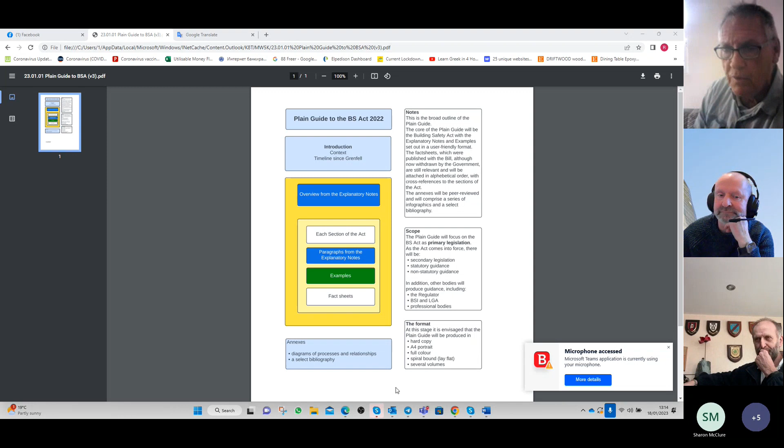Well, listen, as you know, we record these sessions and do transcripts and high point documents, so I will actually send him literally what you guys have said.

Just to jump on it, and I think, I'm going to do this in a bit of a self-centered way, really, is that if we all understand, maybe as we do in these forums, actually how you construct, how you do appropriate workmanship. I think the question really for me is that I'm really interested in the effect on what happens with Regulation 7. And the reason Regulation 7 is so powerful to me is because it doesn't tell you which way to meet the appropriateness of dealing with a hazard, there's many different ways of doing it.

So I'm quite interested in what they're going to do around CPR, because just because something's CE marked, it doesn't mean it's appropriate to put it in certain instances. It's a bit like just because you've got a damper, or I'll use your example, Chris, it's from Siderise, right? So if you've got a 476 cavity barrier, it's under a BS, and that's appropriate for certain circumstances. But if you've got a linear gap, then 476 isn't appropriate, it's an EN.

That's differentiating in Regulation 7, but you can't have something under 476 which is CPR because it's not European, and under the European system. That's the bit I'm really interested in, because what I've found is, in my experience, people don't know the difference between EN and BS.

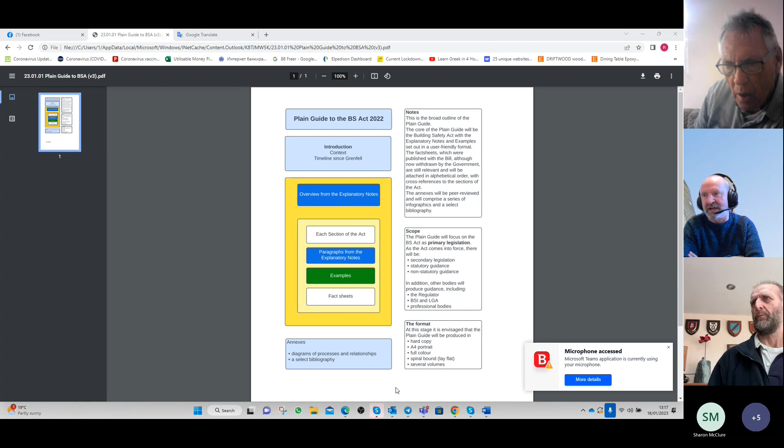So for us as manufacturers, we have to accept that we've almost become partially part of the educational process, because a lot of our end users, some of them are very knowledgeable, but some of them have not got a Scooby-Doo. We've ended up becoming de facto designers.

I'm just thinking of a good analogy here - it's like going to a grocer and asking for a tomato, then going back and complaining it doesn't go in your fruit salad, isn't it? It's the same thing. You know what I mean? It's that old chestnut.

Is there anything else? You sold it to me. No, that's it for me. Sorry, is there anything else? I'd like - I was just picking up on what Paul was saying there in terms of people understanding and appreciating the importance of this. I was just knocking something together, that's why I wasn't concentrating when you asked me the question.

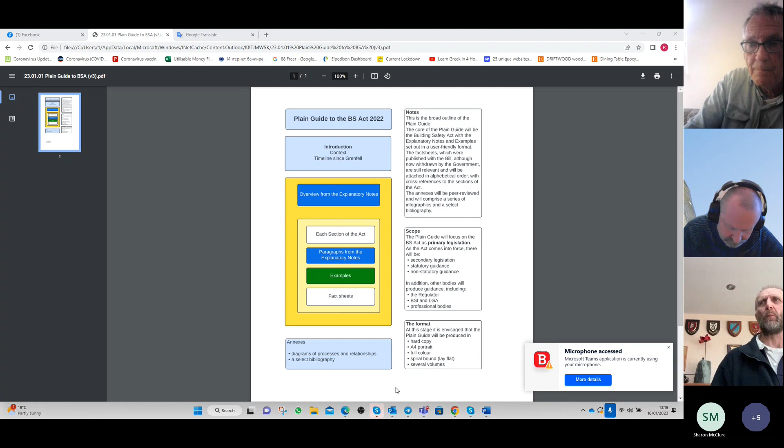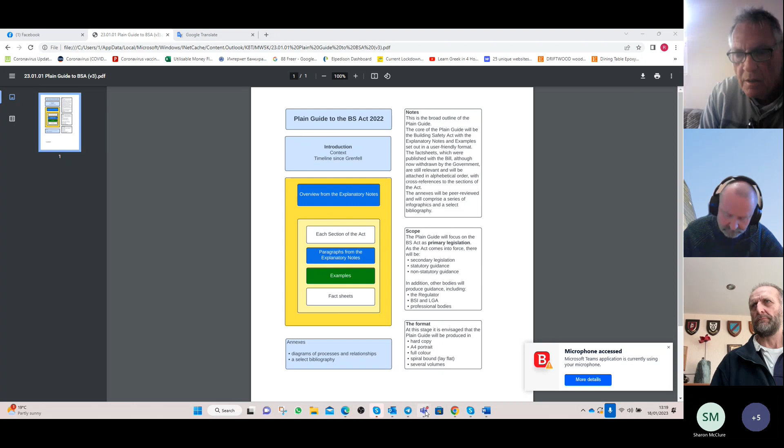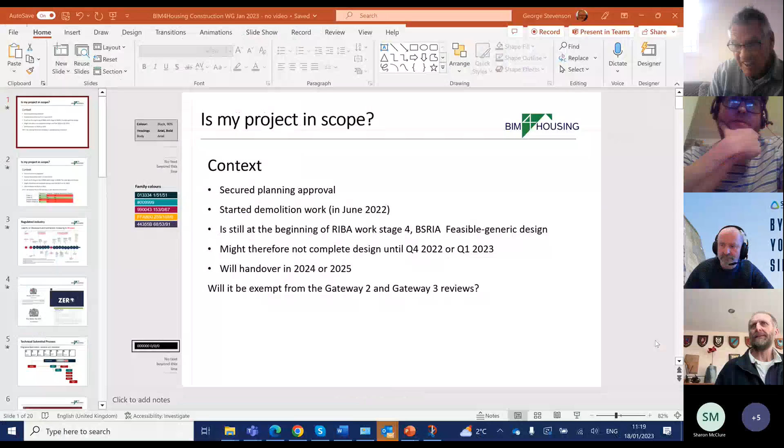So I was really picking up on what Paul was saying earlier. So if I look at - I've just realised I've not shared my screen yet. So one of the things that we were looking at before Christmas was really from a construction point of view - is my project in scope? Some of you might have seen this.

If you've got a project that has secured planning approval, demolition work has already started, it's still at the beginning of RIBA 4, and in this particular case, design is going to be completed this quarter, and then it will hand over in 2024. Is that in scope? And will it therefore be exempt from Gateway 2 and Gateway 3? Now those questions should be relatively clear, you'd have thought.

But when we actually asked specialists, we found there was absolutely no consistency among the people who are subject matter experts as to whether it was or wasn't. I thought that was really quite interesting and of concern. I don't know whether that sort of ambiguity - I know Jan's on the phone. What would you say on that, Jan?

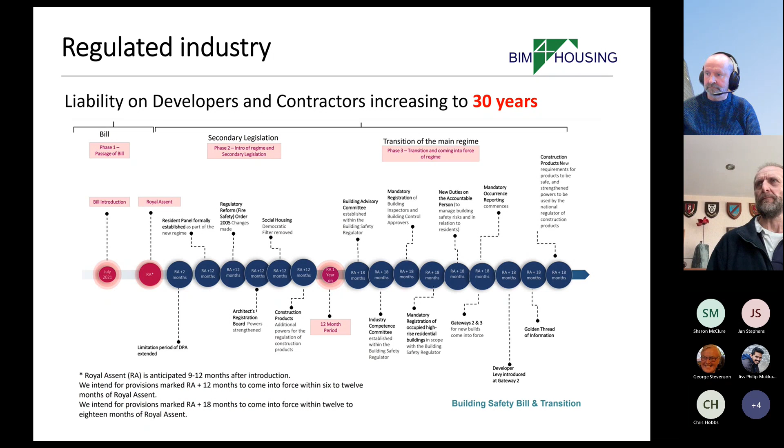So would you say that's one aspect? The other aspect we've got - sorry, this is coming - we've obviously got the Building Safety Act, we've got the Fire Safety Act, and what's become clear is that those are two different regulators who are looking at things from a different perspective.

The other aspect I think we're tracking at the moment is carbon. Most of you know we've got this partnership with Zero. When we started it two years ago, it had 20 members - we've now got over 800, and there's a lot of activity going on around that.

One of the things that's come out of that is we're collaborating with a company called 2050 Materials to get embodied carbon information using the templator, so that can then go into product libraries. The idea is we've got a mechanism whereby products can be tested for their information requirements, and if somebody then swaps something out, we've got a mechanism to track that those products have been swapped, and therefore we've got the means to engage with people like Travis Perkins.

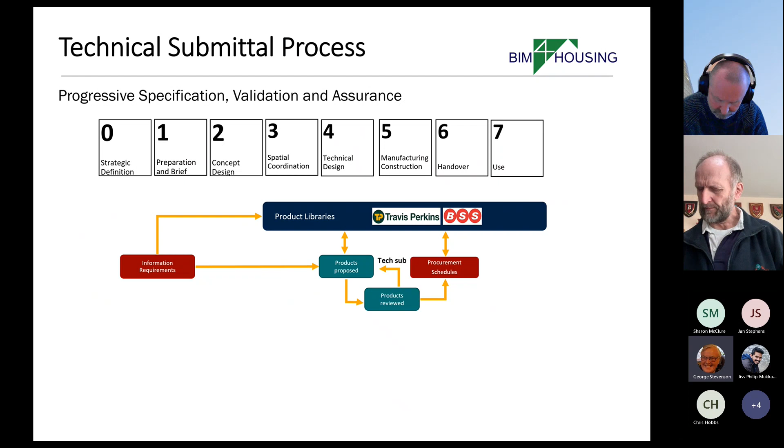One of the things Paul's going to come on to in a minute is the work he's been doing, or we've been doing together, to track through from specification to product selection. An aspect of that we've been working on - this is with Bouygues, Balfour Beatty, we've now got ISG agreed to collaborate with it, and Barclay Group - is having a standardized BIM4Housing library of data sheets.

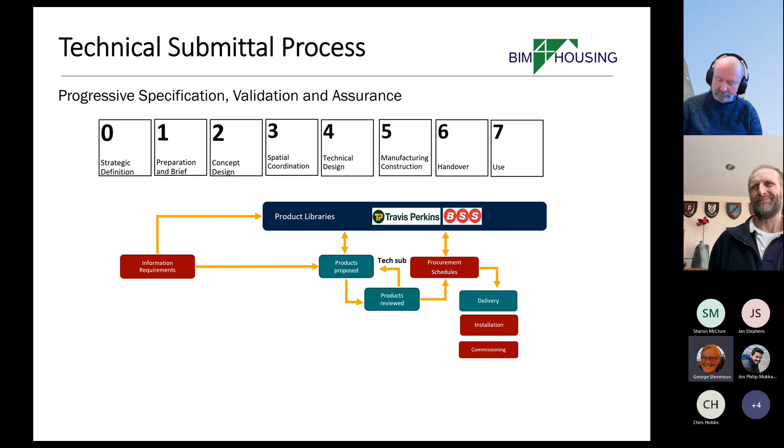So manufacturers' data sheets, so that we've got a mechanism, at least at a basic level, to be able to have a common library that anybody can access to put together information. That's something we're getting underway, and we've got Lloyd's Register engaged in that process, and I've got a conversation later this month with BSI. What we're trying to do is look at the collection of manufacturers' product data, but in a much simpler way than we've been trying to do with Lexicon.

Lexicon we're very supportive of, we want that to move forward. But in the interim, if we've just got data sheets from manufacturers as PDFs, if we can create a library of that, it's going to make it a lot easier for people to track things through. So this is the product library we've developed as ActivePlan, but it's free, and it enables manufacturers to provide their information either as a data sheet or as a document. And this is Materials 2050, these are the people that are going to put their information into the product library.

They've got carbon information on all of these product types, so it's just a different perspective, but the objective here is because I'm told that constructors are being asked extensively for carbon information. So we've got fire safety, we've got building safety as drivers, but now we've got carbon as well. I'll just stop for a minute. Does that make sense to people, that this is what we should be doing?

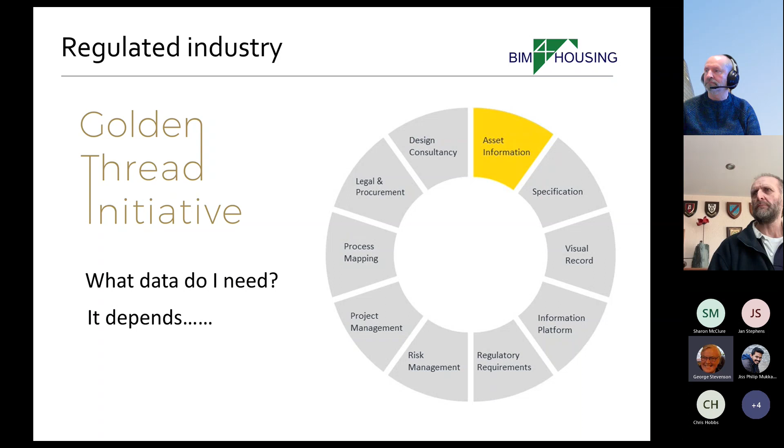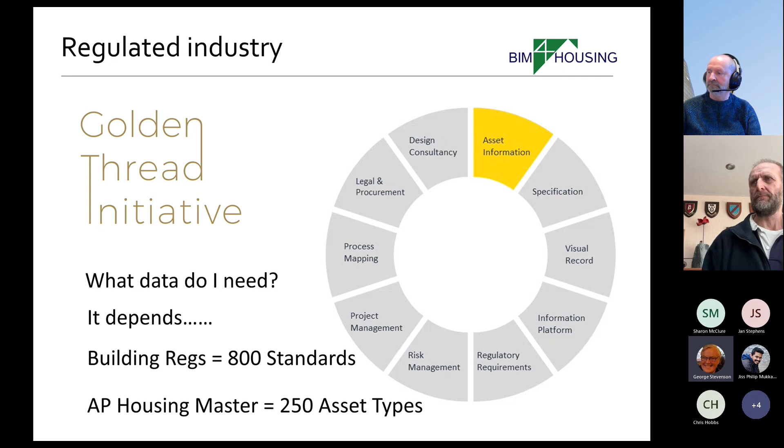You've seen this before, but the key thing is making sure that we're getting the right data for the right purpose. One of the main questions we've had is, for example, if we've got a cavity barrier, what information do we need to know about it? It always depends, and because we've got so many standards to refer to, we need to tie it back to some prescriptive situations, which Paul's going to go through.

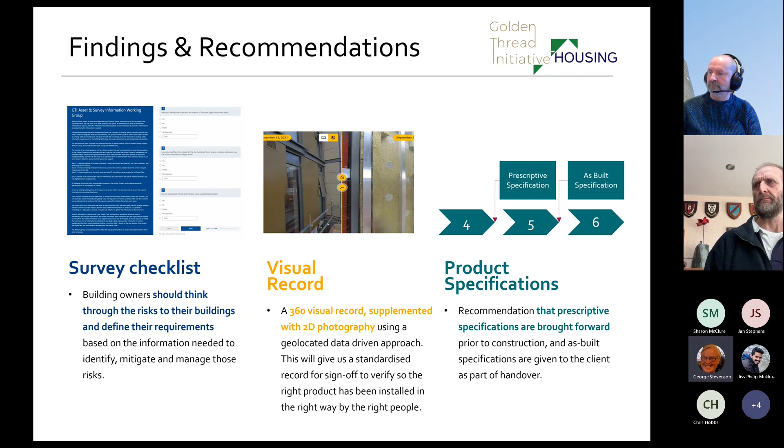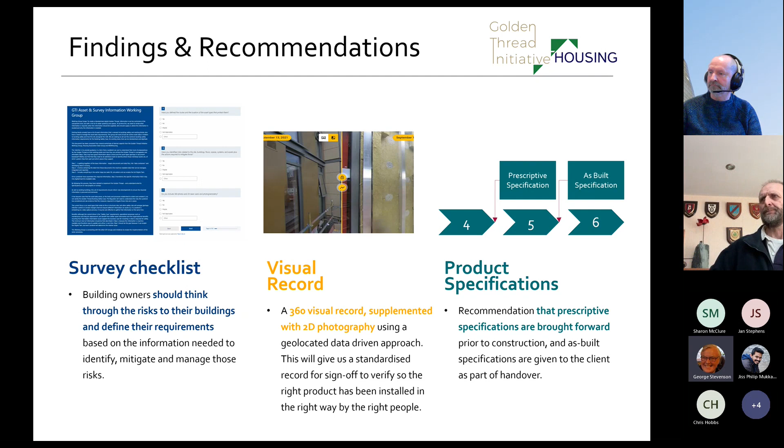The work we've been doing is to try and look at how we can capture the information that's needed as documents, then as visual records, but then this issue of how do we go from descriptive specifications to prescriptive, and bring the whole process forward so that work is done much earlier, so that we can address the gateways.

I think I'll stop there now and just ask Paul, would you explain what we've been trying to do in the tier 1 group? Yeah, I'll tell you what it is.

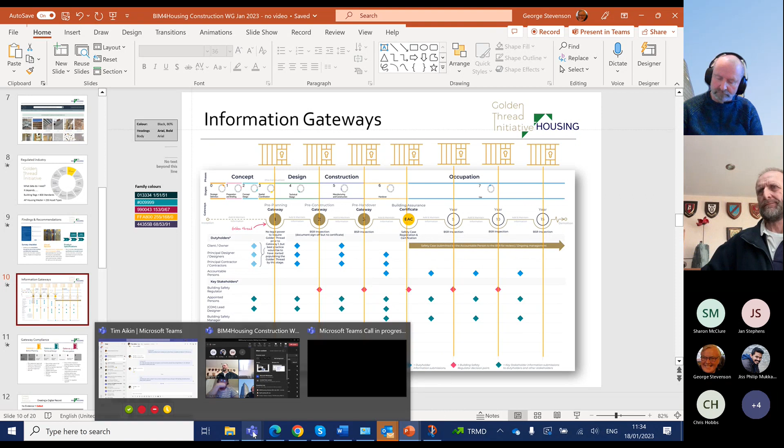Let me just bring my screen up as well. Hold on, I've lost you. Here we go, put my camera back on for a second. Hold on, is it going to work again? That's it, sorry, every time someone shares it goes a bit funny. You can't get people, they start freezing. That's why I've turned it off, so I do apologise.

So look, there's a couple of things that have been going on. Probably to explain, there's many different things happening in the industry. One of the big things for me, which I've been trying to get working with other people externally as well, is around things around—there's a thing that's been launched called the Passive Fire Knowledge Group, and I'll explain how this is all going to tie together.

That's the ASFP, BISA, and you've got the FIS, and some people common to this group are involved in it. That was about getting the knowledge out around how passive fire has been selected, because one of the biggest issues—and my focus has always been around Regulation 7—is that fire stopping's a blasé term, it doesn't really exist. If you've got linear gap seals, it's a linear gap seal. If you've got a penetration seal, it's a penetration seal. If you've got a damper, it's a damper. It's got a seal, but it's a seal related to that test, nothing to do with, say, penetrations or stuff associated with doors. It's completely different.

So where this all ties in is that the big thing is if you've got a process where you can enable the industry to behave in a certain way from cradle to grave. The example I used previously was things like CIBSE Code M, which in that terminology is about how people behave around commissioning management in buildings—assign a design team, who should be involved, who's the specialist, who's doing what, who's accountable for what, and how it flows through the RIBA stages. The problem with passive fire and even active fire is that there is no such code. There are individual codes, maybe from great organisations like the ASFP on things like penetration seals part 3.

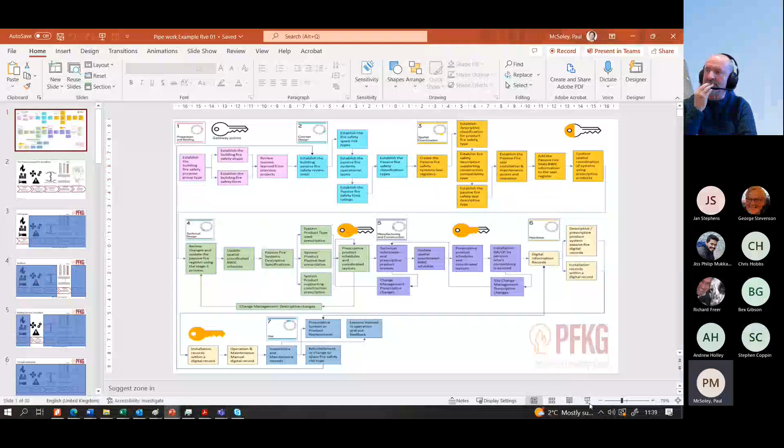Just bear with me. You got it on the record. I'm still trying to do it. I'm just going to show you what it kind of looks like. I was going to turn my camera off because it will clash. Hold on. I'm going to use, I'm not going to use the one I used last time, I'm going to use the modified one, George. Just 1 second, hold on. It's not that, I've got so many of these things open, just bear with me. This one will do. It's not completely the right one, but it will do. Just 1 second, hold on. Let's just share this up. If I can get this to buzz along. Look, I won't be able to see your hands while this is doing this, so if you've got any questions, just ask me.

So look, this is what we put together for the PFKG, the Passive Fire Knowledge Group, at the Build Expo when it was over in West London. What it was is a case of you've got a process where you sit there, and these lovely things come from George. It's around gateway points - gateway 1, when it should be done, gateway 2 - this is all about change management within Gateway 2, because that is never going to go away. I'll explain a bit more on that as I go through. And obviously about how you hand it over.

It's all this bit here which is key, around all this BIM information. So I want to concentrate on this bit, and all it really is, is that someone's got to set the purpose group of the building's the key one.

Is it high end? Is it high rise residential? Is it a student block? Is it a big high rise hotel? What's the shape of it, the depth, the height, the form of it, because this depicts what goes into it - basement levels being below 10 meters, etc.

Lessons learned from other projects you've done of similar natures, things that you've learned. Then you've got to assign basically a safety review team - no different to Code M. Establish who's going to look after all of it and who's going to be the lead for making sure it's strapped together. Then you've got to look at the risk of the space.

The space risk depicts what the systems inside it should do, whether it's a door, a damper, a duct, a flue, a cavity seal, whatever it is, and establish what those ratings are. Then you can start looking at all the classification types within your building, because the problem is when you go to planning at Gateway 1, this is just what I'm seeing.

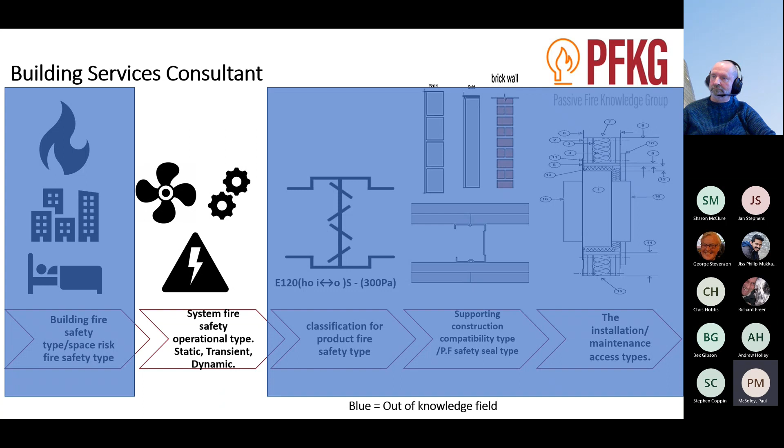Same with doors, it's security related. There's a security consultant that will know more about the function of the door in practice than the architect will, or the building services consultant will.

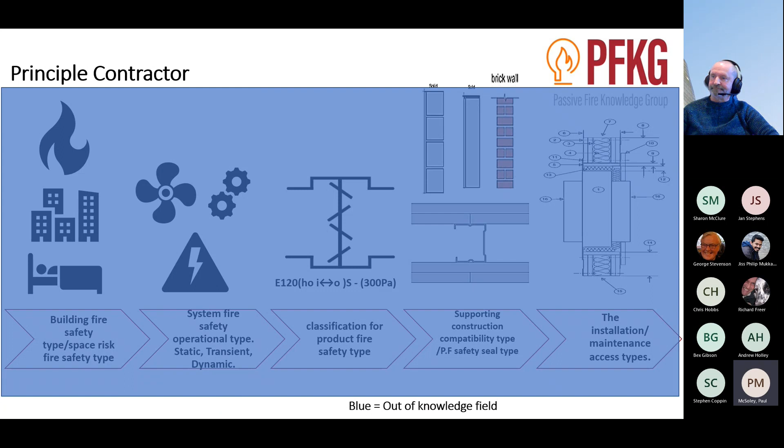Just to put it out there, principal contractors, no disrespect to us, we tend to pass risk down the line. So it's all out of our knowledge really, because we're relying on specialists. That's why, Chris, when it goes wrong, we'll blame you. Just a joke with it.

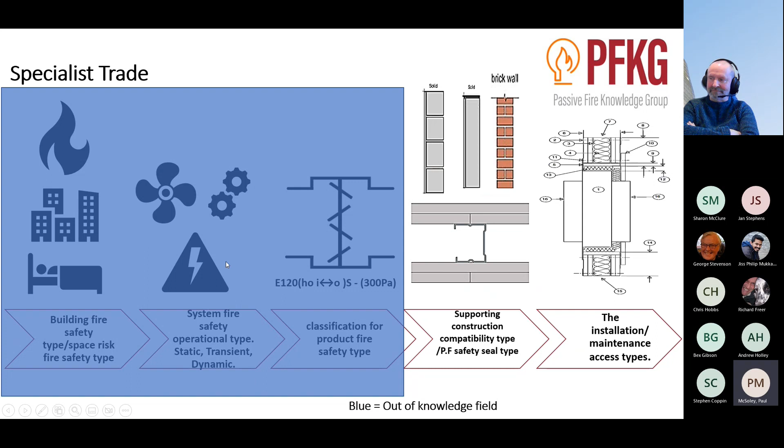And you can look at the specialist trades. So if you've got a drywall company, who's a member of the FIS, like BDL or someone like that, they'll know how to build a wall, but they don't know any of this. And you look at the people that install the fire dampers, or the smoke control dampers, they'll know how you install that, but they don't know any of this.

They can't tell you that that is right for this. Then when you look at the product suppliers, like yourself, Chris, you can tell us I've got something that meets a classification number. You can't tell us where it's appropriate to put, whether you can install it, because it's a site condition and it's a summation of fire engineering, right? Same with the likes of BG, Knauf and Siniat. They can give you a wall type, doesn't mean it works for everything else.

That's kind of like the conundrum, and to solve that problem, how it's all strapped together, and what I get onto it, is about knowing the installation is prescriptively in a digital format - that's what you got to get out of this. Then you know your quality parameters because you've gone through this process for a product. Then you know the benchmarking of it because all the previous bit is set.

Then you can do the acceptance of information. You can do digital records. Then you can have future information for change management. This is all going to rely on good templating of all those properties for BIM and how it's recorded in that model as well. Some of it, I think we kind of agree, George, you'd have PDF held information, stuff that's all about the asset, which can go into the template, and you'll have stuff which affects the geometry. All those things are going to be important for each product to record.

But again, it's all on the basis of what that risk is, what the operational type is, how it should be classified, how it's compatible. And that isn't just about one product. This is about all products going in one wall, them all being compatible. And I'll show what that looks like in a second, and how you install and maintain it for future.

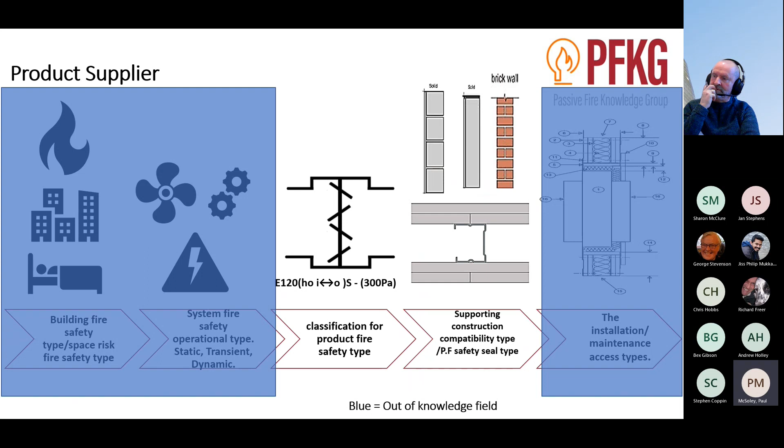And that's really how, in my head, the whole thread works for construction. It should be no different. So when you look at, you know, you could take dampers - I did nick that from you, George - the doors, whatever. If you've got all of those in one wall, that wall's got to be working for the summation of all of those parts.

And I haven't got cavities on there, Chris. I do apologise. I didn't include cavities, but that's one that has to be tackled separately. Unfortunately, I've got to be like a dentist, one at a time.

So you go, well, that's compatible. Maybe it might be tested and work in that, but if the type of installation might not work in that, that might only work in that. It's not tested in that. So you've got to get the kit and all this stuff in like a Rubik's Cube order to get it right to work with the one that you've got.

And that's the bit that's kind of all messed up because, as I said earlier, not one person from one discipline - services, fire engineer, supply chain - can do it on their own. Someone's got to bring it all together. And that's the world we kind of live in. That's the bit that's not kind of happening.

So to get into the whole process, what it looks like is that if you've got a thing where people are working to a passive standard, and this thing will get launched at some point, and I will bring it fully into here once the RACI is fully done, so we can all have a good chomp at it.

Because everyone's view is important, especially around wording and how that operates, because some of these bits may change. It's all on change. The key bit for me is getting description and prescription right, which is where this comes into it, about how you do workbooks to get there.

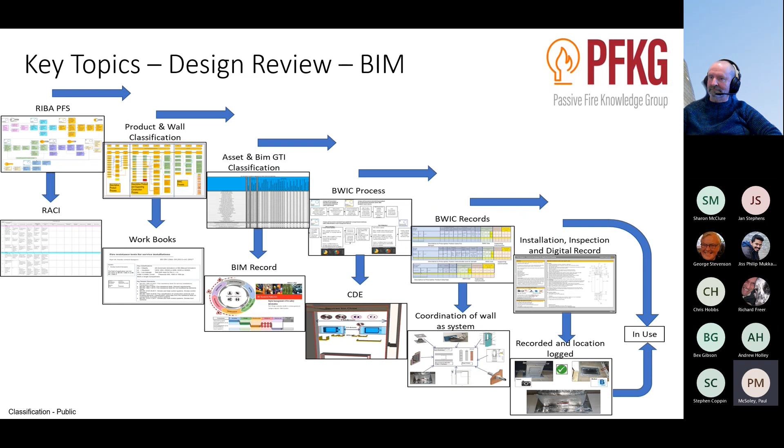Then you can look at how you digitally record it when you install it the first time, then how you do your records of checking in the future. Because for me, the first installation is the big one - the wall type's compatible, the seal type's compatible, the support rod, the fixing's correct, it's in the right place. The last part is whether the damper opens and shuts correctly. For future years, all you're checking is the damper opens and shuts correctly, the door functions properly, and the surroundings haven't changed from what was recorded originally. That's the only way you can kind of do it.

So if I just go on to an example, as I explained the other day - if you take a fire damper in a protected space, so you've got things from Part B, you've got things from the test standard, there's things in BS9999 as well, but basically you've got ES category stuff that's required in protected corridors because smoke risk is the biggest problem.

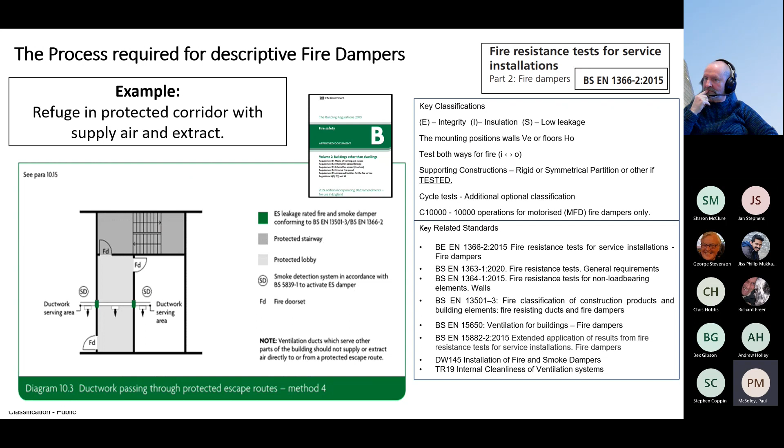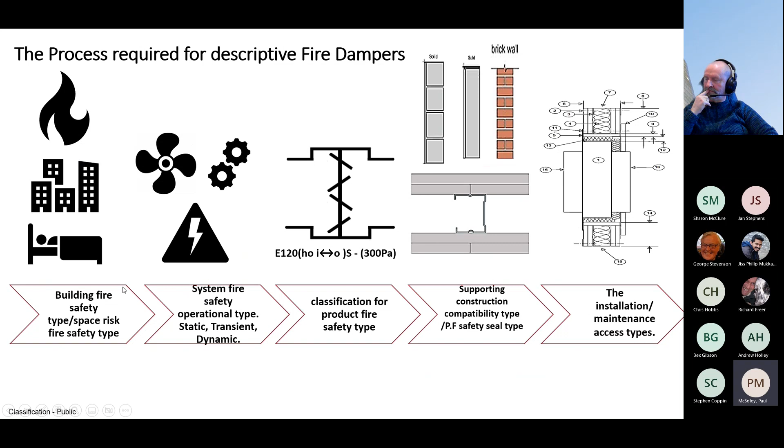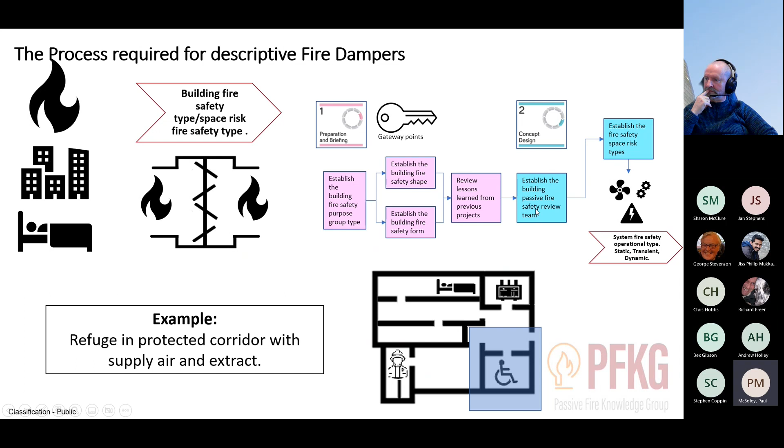So you come down to it and tackle it in those terms - what it actually looks like if you were going to select it. So I went, okay, that's the same diagram for me. Let's concentrate on this bit first - what does it look like? The purpose group of the building, the shape and the form, forgetting that part, then you can start reviewing what it looks like before you go on to the actual space risk.

So I did it in a very simple diagram that said these are all your purpose groups that exist - multi-story residential, dwelling houses and duplexes, prison, schools, hospitals. You've got high-rise sort of, or just like student blocks, places like that, commercial office.

Knives and forks, which is obviously your dining out retail sort of categories, auditoriums, cinemas, factories, storage, and again the biggest one at the moment, car parks, because every time an EV vehicle goes on fire in them, you lose everything. Then you've got the height of the building, and so's the form, because if you've got big basements or big heights, it affects the systems you have to put in and classifications.

Then you've got space risks. So refuge has got a specific risk. There's smoke risks in buildings, fire risks, sleeping risks, evac - is it phased, is it single? Lighting's a big one. Power critical supplies, primary and secondary supplies - both have the same level of protection, one primary, one secondary.

Firefighting services. So if I picked a refuge, the shape and form of the building is important because it affects how many escape stairs you have, how many refuges you're going to have, but the refuge is the risk - the fire risk and the smoke risk. That's what's in there, that's what I'm looking at for that space.

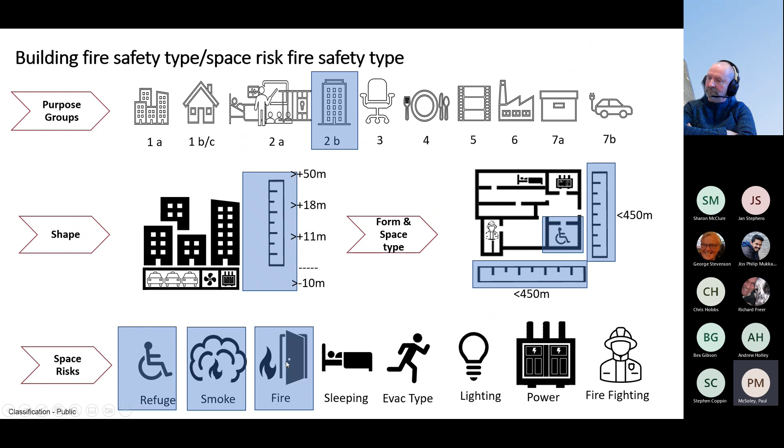Then you go on and say, how do you put that into a shape and form where you can look at how that space risk sits? So we put this together and said, well, if you look at a protected corridor which has got ventilation in and out of it, and it's got a refuge in it, you've got to protect against fire and smoke, which is your E category and your S.

The time period varies on what the protection height of the building is. But because of Part B, it's always automatically closed by fire alarm activation. So they're always automatic, they've always got a power supply and a fire alarm interface. The big thing that gets missed is that you've got to pick the appropriate blade type to meet your Part L calculation.

That's the bit that causes issues, it's the other add-on that affects it. So when you classify fire dampers, you can't just go 'oh it's ES120S, 300 pascals from C10,000' - where it is, you've got to go, well, it's got a blade type of X to meet this, and it's all those other bits that come into it. Obviously the orientation comes into it as well, which I'll get onto in a second.

So if you come to the next bit and look at how you classify that properly, well it's the same diagram, but I've just changed it. I said, well actually, it's now an ES. It could be 30 to 120 minutes, only be method 4, which is your automatic. It's that, but direction of fire is both ways.

The plane of orientation is a vertical wall, so it's that. And the cycling's up to 10,000 cycles it's tested against. So that's my classification number for the product that I need. It doesn't mean it fits, right? I've got to pick one to make that condition.

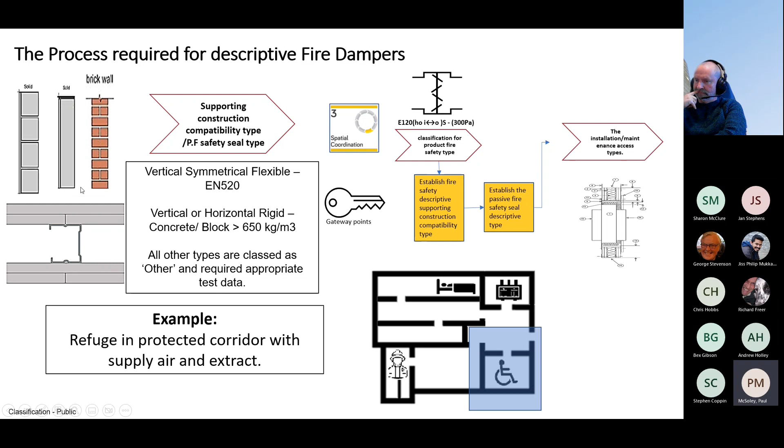But before I do it, I need to do a bit of compatibility against how the walls work as well, surely, right? So there's only two types of wall, flexible and rigid, as we kind of know - your stuff's all concrete essentially, isn't it, Chris? So you go, well, these are all the type of frames that exist in fire damper terms on the market. I already know that bit because I got it from above. So if I pick a flange one, I know they work in that type of wall.

Well, these ones have got other things like casting, you can only put it in brick. This one you can put it in both, but the one I'm going for at the moment is that. This one works in either, that one works in either, that only works in that, that only works in that, that'll work in either - because flexible goes to rigid, not the other way around. But even though that's tested in flexible, the studs and things are in the wall, so you can't put it in rigid, it would never work. Same as that, it only works in flexible.

So you've got to have a working knowledge of the kit that you're using. This makes it easier for people to understand, at least ask the question. So anything else is classed as other - it's got to have been tested anyway, so I can't do all the other types of wall, it's impossible. But the biggest thing is you've got to check the wall thickness against all the other components in that wall - doors, ducts, flues, glass, whatever you've got in there.

Is that wall type and thickness you're going for meeting the requirements of all the other kit? That's the seal types. I put the seal types on because if it's EN520 board for that installation, with mineral wool on them, what's that got to do with a passive fire protection company? Are they really the appropriate people to be putting EN520 on a dry wall and putting mineral wool in it? Just food for thought. I don't think they're the right people to do sand and cement, are they?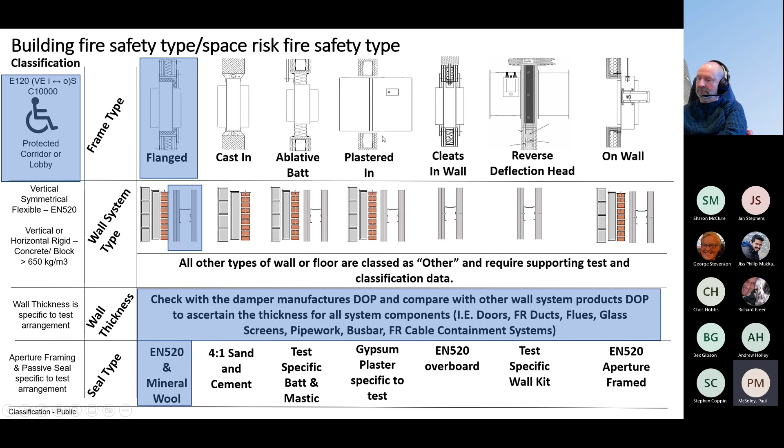So it kind of goes through all of that, so you can see it pictorially. It's the same thing as on those big nasty Excel sheets I've issued before, just a different way of looking at it. It's about installation, access, and maintenance.

So you sort of go, well, how does it work? I know what that bit is because I've now drawn it all out so I can see it - I've got that type of damper, that frame, that blade, that position, that type of wall. I can determine that by going through all the other wall types to get to the 122mm determination.

I know the seal type, but then I'll look at the access requirements. These things need access both sides, and this is important because everyone puts shaft walls in from an architectural point of view, not having any shape or form of architects - they put a shaft wall in because it's a shaft. But as a builder, is shaft wall appropriate for all the products I want and how I want to install them? Because this stuff isn't necessarily tested with shaft wall. I still need 500-600mm on the inside to safely install all of this, screw it in, get in and out. I still need a door.

And it's the same for the stuff in the floor. I've still got access doors that need access for future cleaning - it's still got to be there, you can't get away from it. And I need breakaway joints - someone's got to form a breakaway joint as well. Do you know what I mean?

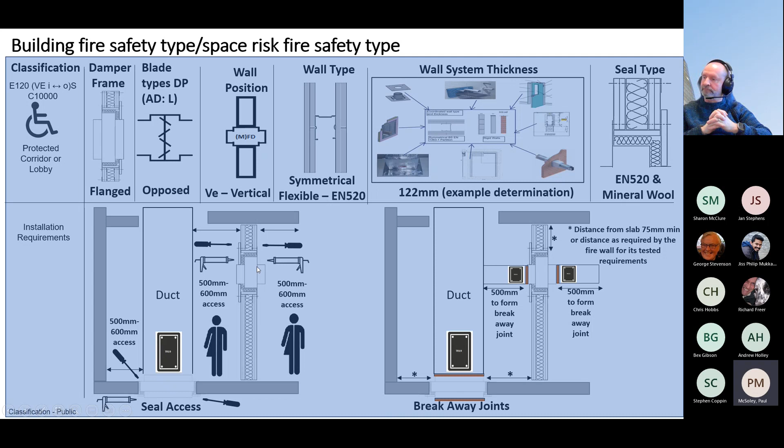So some of these dampers, like you see above, are quite narrow, some of them are very long. You've got to pick what's appropriate for the condition as well. Then you can get to what you want, and that's the classification number of it. That's my whole thread and how I've got there because I've recorded it - otherwise you can't do it another way.

And that's the kind of thing that's interesting for me, is that even with all the regulation, primary and secondary that comes out, it's not going to make people any better at doing this. That's the bit that's... yeah.

I've seen you go through this several times, Paul, and every time you do it, more of it sticks with me. But I think what we're doing here is identifying how complicated it is. Yeah, and as you say, everybody wants a simple answer, but actually the task itself isn't simple.

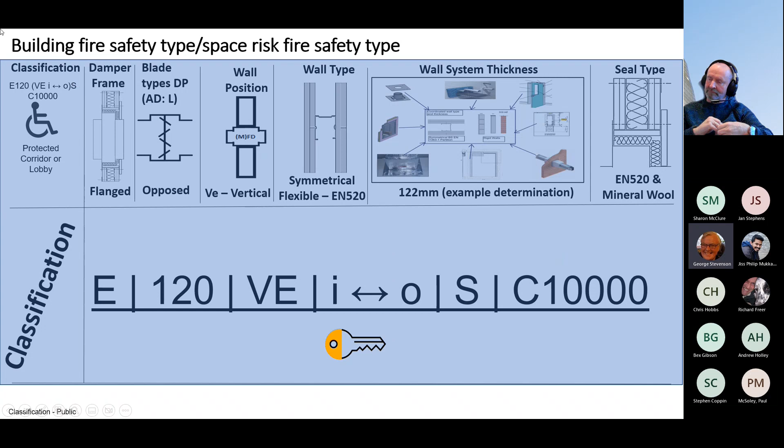There are many different decision points that have got to be taken, and you need to be able to inform each of those decision points with the right information at the right time. Yeah, so even people that have got all the knowledge still need the right data to make those decisions.

And this is the important thing, George - there's several views, and mostly my view is that getting procurement right would solve a lot of the problem. It won't solve the problem where, if you're a project manager looking after a complex package like building services, it doesn't mean you have the capacity to select or verify that products have been selected correctly, just because you're a project manager of that package. It doesn't mean you're technically competent to get it right.

So if you're relying upon, and this is where these diagrams are prevalent, if you're relying upon the fire engineer to have got the damper selections right, you think again.

If you're relying on the architect to get the wall to work with it, think again, because it's about the site-specific case. They don't know what you want to use, because the drama's been that everyone pushes selection down the chain, because that's where the best value is.

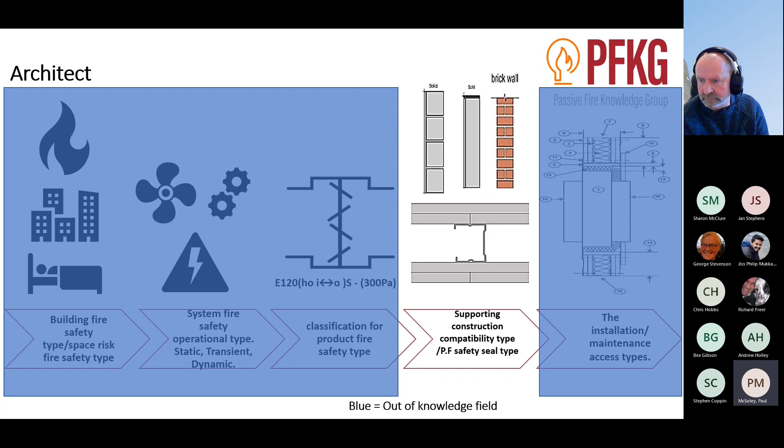The best value is getting the right description and hopefully a prescription at the earliest possible stage to meet that condition. And everything else then becomes a lot easier, because even if you take drywall, there's minimum distances that depend on the type of wall you're using for where you put holes, but that's specific to all the things you're putting in the wall. If you know the thing you're putting in the wall right in the first place, that's one less drama to worry about. We're not even getting that bit right.

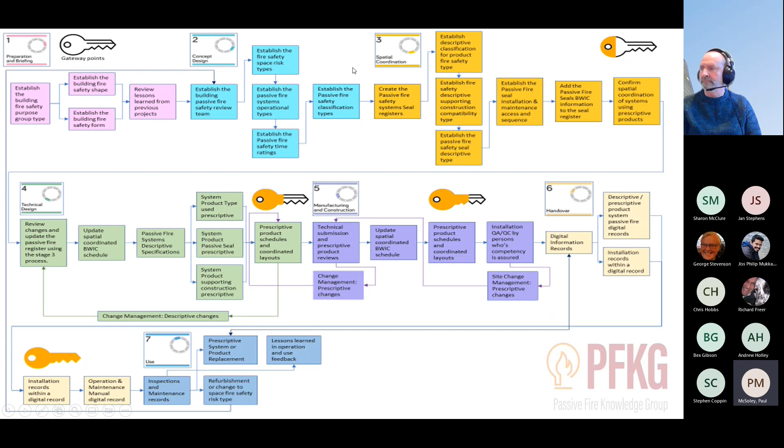Because to follow this makes things a lot easier, because you're going through an actual process which should bring it back into an order about how people should behave to get there. The bit I'm still trying to work on and get done is this process for each individual product selection.

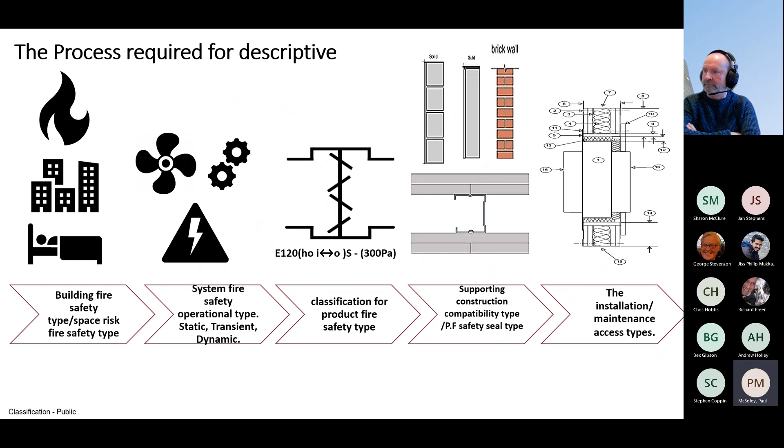So doors will be different, with a similar flow on this, but the same selection of classification and things. When you come down to this part here, these diagrams will be different, because you've got to look at doors in specificness to doors. It might be they swing open, do they swing both ways, do they swing one way, are they dual leaf, single leaf. That kind of stuff's got to be declared for the location.

And this is the hard bit. So if you did a door schedule, that door schedule really should become a builder's work schedule in the future for the doors. And it should have on it the wall type number, which is then the same as the wall type number on, say, a damper schedule. That's really all it comes down to.

And I think if you cast your minds back, I remember being back in my days at Canary Wharf, door schedules and damper schedules were quite specifically common to the wall types they were going in. I haven't seen that for about 15 years.

People are relying on a specified company to come in and do all of this on a single schedule. It just doesn't work. You've got to do it by individual schedules. That's the only way you can narrow it down. And by de facto, I think that's interesting - you see, if you do it on one schedule, the classification's different.

And the thing is, if you've got to look at human error, haven't you? If you have a situation where you're relying on one person - and I'm trying to be careful how I say this because I know things get recorded - but if you're going to give a builder's work schedule to someone, you don't give it to the top engineer in an architectural practice if they're the ones doing it. You give it to the junior to strap it together, and you might go and check it. But the bottom line is it has to be set off in such a way that's right from day one, so there's always that infallibility that occurs.

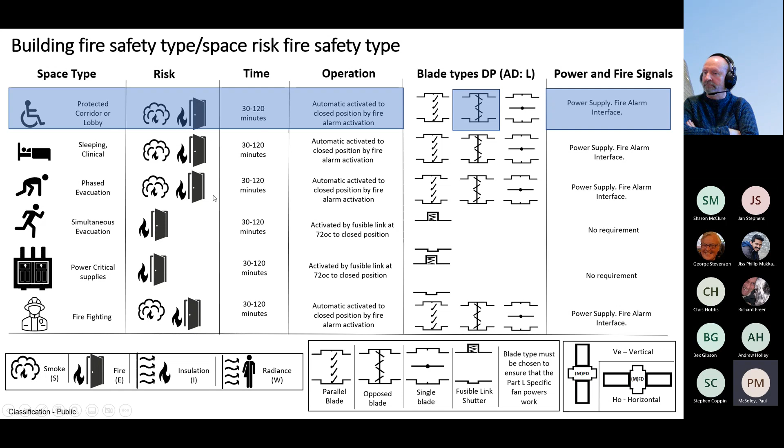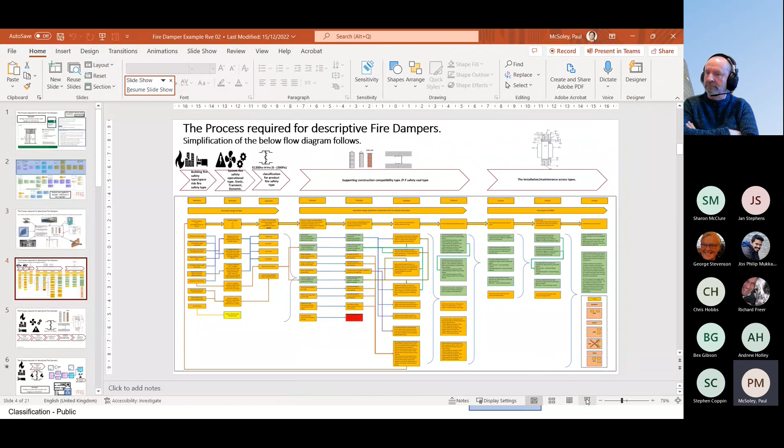Actually, I think I've got it on the other one. One second, hold on. So yeah, all it is taking that simplification and putting it into that process tree in pictorial terms. That's what I've done. So it makes it easier to follow what this means in practice by those diagrams.

It's the same thing. So as we've discussed, you've done this for fire dampers. I think you've also done it for smoke dampers, have you? No, that's the next one. Yeah, smoke dampers is a bit more complex, but and doors. Doors would be. I'm going to try and get through all of them.

The big thing I said before, George, I need to do is just agree how the template looks for BIM. That's the big thing. Yeah.

Because once that's done - and I'll ask Chris this question - if you're a manufacturer and there was a sheet that described everything that could ever be needed to be known about one cavity barrier in one location, you just said tick off what you want. It's a lot easier, isn't it, than you trying to guess.

What you've done, Paul, is you've, albeit for not our particular product group, taken me through all of the highs and lows and the journey of getting to the right product for the right application. Yeah, and it looks at first glance to be quite complicated, but it's not.

But what this would give is a little bit more rigor. All manufacturers want to know is, what is it that you want to know about my product? What is it that will help you to select the appropriate product? And if this is the route to go down, then absolutely fine, because the answers are there. You've just got to put them in a way that's systematic and everybody can understand them.

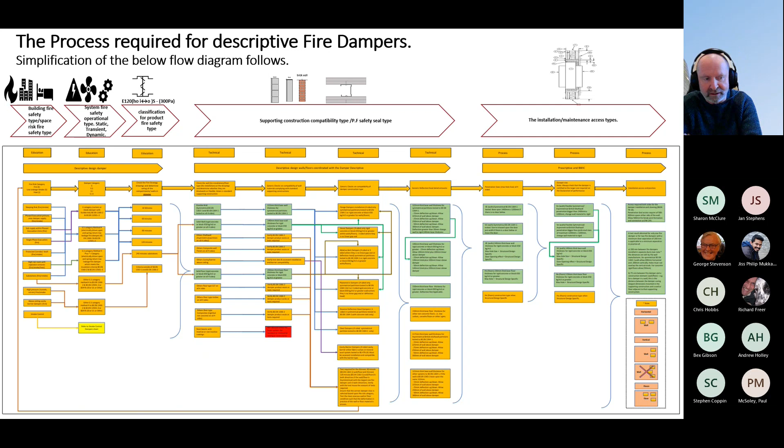Because at the moment we have every project goes down a different route in a different way. And you have, depending on - someone comes to the door and says, I want a cavity barrier. And then this process that you've highlighted starts.

Probably, to be fair Paul, not to the same degree of rigor, because there comes a point where you have to say, look, some of the questions they've been asked, the people that are posing and seeking the product don't know the answer to them either. And they're always working under time pressure. So there comes a point where they make sacrifices or kind of judgments that they might not have made had they gone through this process in the first place. This work has to be done.

What this gives to me is you're front loading the decision tree. So when it gets to site, a lot of the problems are ironed out, because when it does get to site, there are some things that have happened that you can't change, like the wall type is wholly inappropriate for what you're trying to do, or things aren't in the right place, or you can't get access to fit.

And we'll get a picture of some. So can you put a cavity barrier in there? I'm first going to say, well, how the hell are we going to fix it? Do you know what? And do you know what it is, right?

As well, is that I say this loosely, right? Is that when you take your mental cinema - someone said to me the other day, your mental cinema is crazy. And I thought, I'm going to use that word, right?

When you take your mental cinema and put it to paper, you realize how your brain subconsciously worked through a particular item when doing big projects. If I'm doing air source heat pumps, my brain goes around it differently in relation to occupancy, because it affects the type of kit you need, gases, and the rest of it. It's a different subject, but the same process goes on.

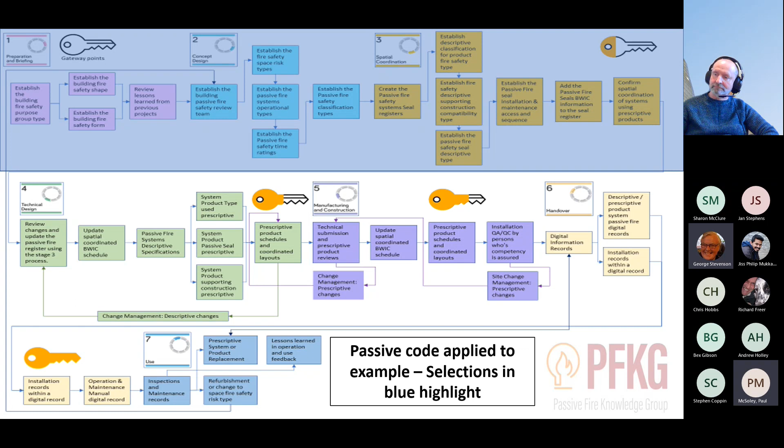I think the point is that it's also a way of evidencing that the decisions have actually been taken in an auditable way. Yeah, and I think that's the sort of thing.

Can we open this up to the wider audience? I've got a meeting on the 31st of January, I'm going to go through it because I want to get this conversation opened up in such a way where we've got you recognized in the process side of it, George, as well. So everyone gets it, because other companies are already involved in it.

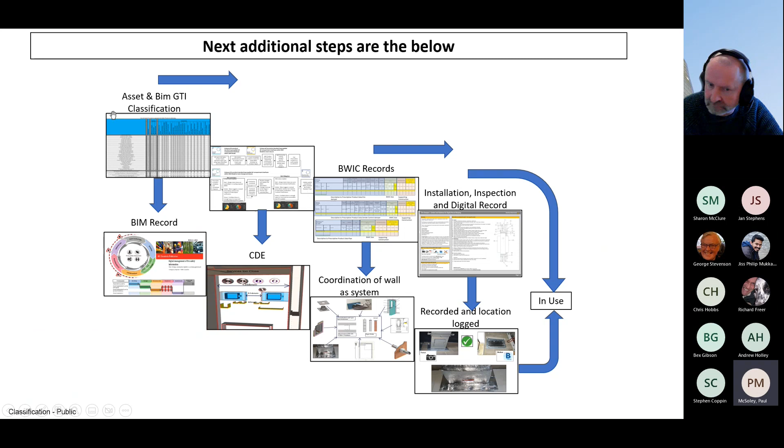I want to make sure, because the key bit to this is this bit. If you look at a bridge, that's the bit in the middle that holds it all together. That's the lynchpin, this bit. I can see that, yeah.

With that bit there, and we'll make it a bit easier in the template, you can unlock it, because even with the 8644 thing, it doesn't do all of this - it does maybe 6 of them. And that's the issue with 16950 as well.

It doesn't understand this. And this is why, going back to Jan's point earlier, if you think the regulator is going to do this for you, think again. No, they're not. I've even got internally a guy that's done a fire audit - no disrespect to it, but it won't work proactively, it'll only work reactively. Does that make sense?

Because they're asking for 'is the damper CE marked?' And I'm going, well I don't really care, I want to know it's appropriate for the circumstance. That's a different question. One of the things I think the penny hopefully is starting to drop is that under the new legislation, you're not going to be able to transfer risk.

Whereas that's the way the industry works, everybody transfers risk. But my understanding is that's no longer the case. I don't know if Steve's still on the call.

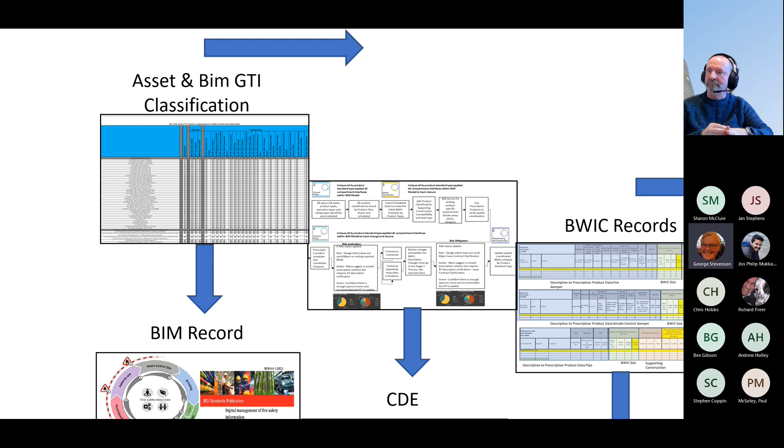Yeah, I'm here, off the screen though. I think that's right, isn't it, Steve? It's supposed to be in CDM, but it's not being policed properly.

And regarding high risk buildings, this will be policed based upon what Paul's flagging up, and we all realise - will the building safety regulator have the resources, let alone individuals knowing what they're looking at. Hence the situation is with the client and the design team and everyone on that project to come out and say this is what we've selected. It's important, as Paul's been flagging up, as we all know, procurement is the Achilles heel. If we don't plan the project properly with sufficient time for selecting all these products that are actually workable, and ideally, in the utopia world, we've got who's going to be running this building alongside knowing how they're going to operate and maintain it.

That's absolutely crucial. On that point, we've got a couple of people on the call, hopefully - Andrew Holley from Tower Hamlets, and also Bex from Live West. Would either of you have a view on this? Andrew, would you have a view on it? Are you there at the moment? I'm very interested, thanks for asking.

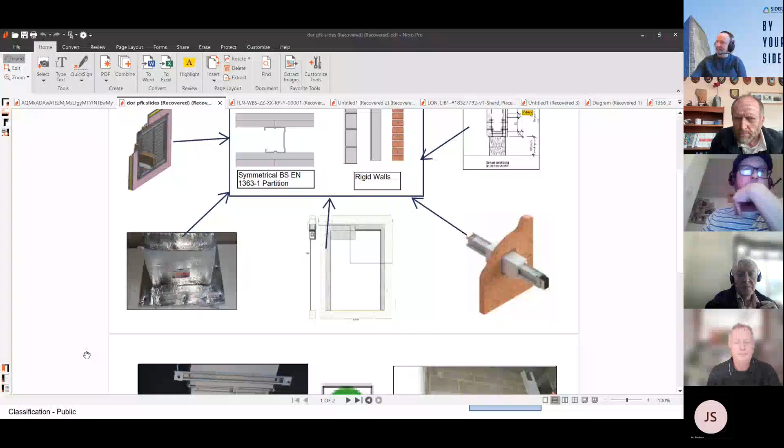Interesting, right? I just want to bring something back up to give an example, and this is some of the stuff I've come across, Andrew. It'll be interesting to talk through. Wrong one, hold on, it's got the wrong page. Hold on, if I come back onto... oh, that would do, doesn't matter.

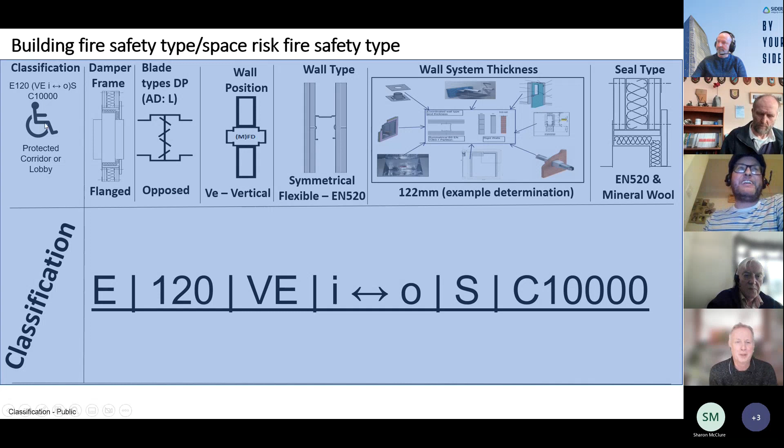If I come down to the bottom I'll give you the example. When you look at this big thing in construction around contractors' design portion, this is where the problem exists. I could be frivolous and say just give me a fire damper, but someone's got to say fair enough, well do I need a damper? Where is it? Well, this is where it becomes very difficult, and I'll give you the examples I've seen.

If you take this, I've seen jobs where what they've done is they haven't selected an ES, they've selected an E, which is this. So first of all it's not motorized and it should be, and they've installed it. It's not just one of these that's been installed, I've seen one job with 140 of them, on a phased evacuation situation.

Now, the problem isn't just the fact that this needs to be changed to an ES. The wall type was wrong as well, so it's just the wrong type of wall, installation method, everything, because they've used a passive fire company that doesn't understand dampers.

I'm thinking, by going to the market and going cover an FD, they've got an FD, they've just got one of these. So the other thing is Part L - this has got maybe parallel blade which might have 60% free area, opposed blade might be 50%, single blade might be 60-65% free area, maybe 70%. The ventilation duct's all the wrong size as a consequence, so ventilation doesn't work when you put it in, because the damper's closing half of it off.

2 watts a litre has gone, which is your Part L. It's all finished because that bit wasn't done right in the first place. And the same parallel exists with doors.

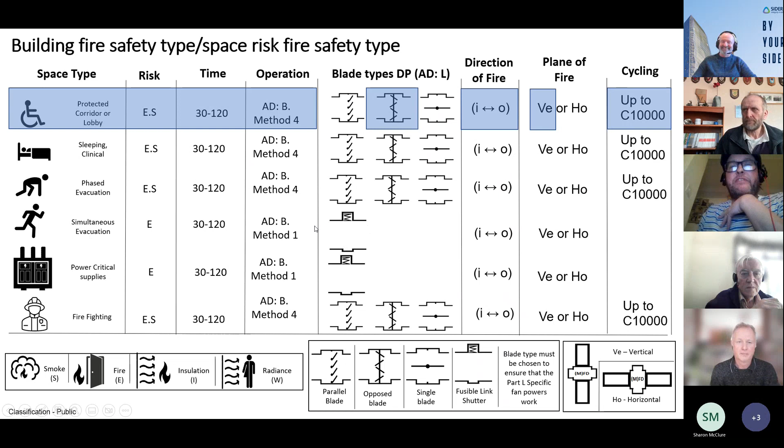Just to get on with it, if I go down to the installation method at the bottom - let me bring up this picture quickly. If you've got displacement systems under the floor, there's a minimum height that floor needs to be to put the ventilation under for displacement. And when you start looking at access, maintenance and how the riser's been made, it could be an open riser that's nice and big.

You get situations where the slab design's actually wrong as well. So if you haven't gone through a process at the start to make sure the shape and form is right, that the slabs are in the right place, your structural design is wrong too.

That's the bit I'm seeing as well - structures are being built wrong because the structural engineers just want to get on with it. I'm going, hold on, where do you want them to put the hole? I need the specific size. And if it's too big, I've got to try and shrink it up.

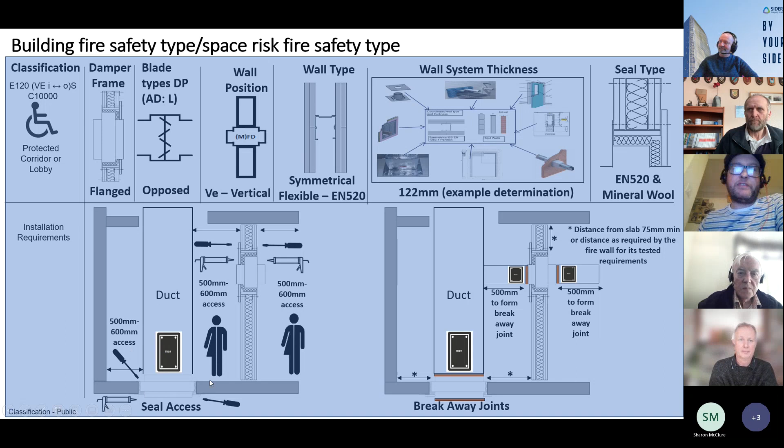But actually, if the kit is sitting under the floor and it's a displacement system in an office building, if that line's wrong and there's no slab, or the slab needs to shrink, the slab design is wrong.

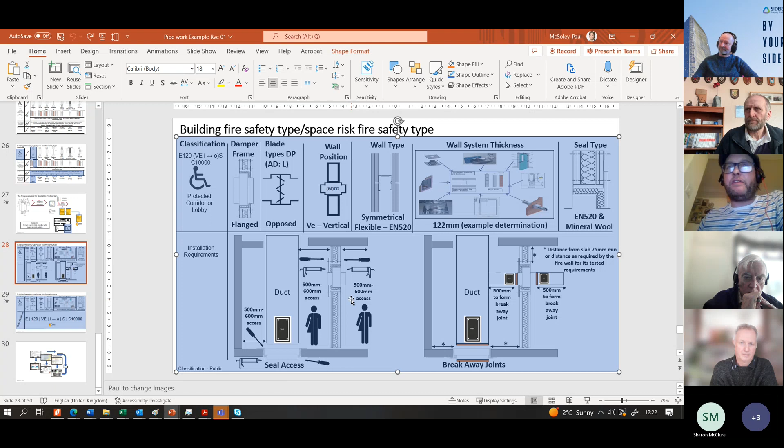This is what we're coming across - all these different factors coming into it, because you've got to go through this kind of rigor for dampers and smoke control, very similar with this installation rigor, how you require access to get at the seals, same as flues. Even doors need access on both sides to install the seal properly. You've got to have that space to do it. We've shrunk things down so small you can't actually do it in practice.

So I have to verify they've actually got the right product initially, that the number's right, that they've chosen a frame applicable for the wall type being used, with all the other components - that bit's right. I've got to verify all of this, otherwise I can't verify I can actually fit it on site anyway. So it all does come into it.

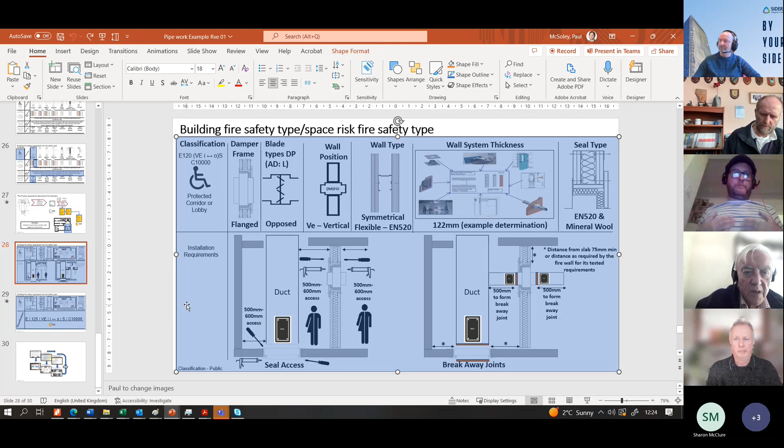Paul, we've just got 5 minutes left, and I've got a quick request to make to people. What I'm trying to do is connect with some fire engineers, because I think we need to engage some fire engineers in what we're doing here. I wondered, Andrew, do you know - could we compile a list of people we know who are fire engineers?

We've got a couple of fire engineers we're using, but even then, they're limited in their specialisation. Sometimes you think actually they're not as great as we thought they were, or they duck and dive because they're the ones with the insurance liability. They'll say verbally that this is fine, but if you ask them to put it in writing, that's a different story. So there are people out there, but whether there are enough good people who really get it involved - that's the problem, Andrew, they don't know.

We've got Alan Curran who does a bit of work for us in the other thing - it's going to come back to me in a second - they do all the CLT as well. He's involved in that because I've done a lot of work with him on products on sites, because fire engineers do not understand products.